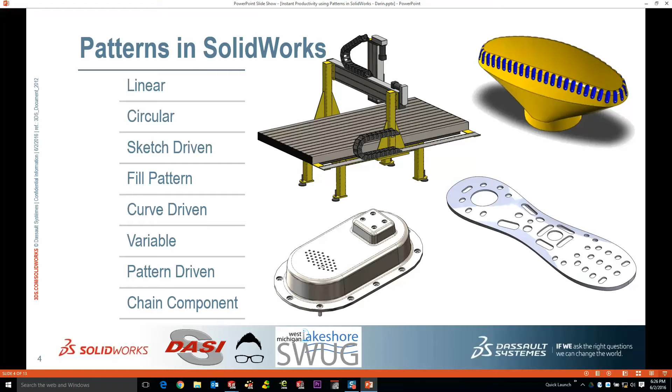But linear and circular patterns really just scratch the surface. We get into other more complex things. Table-driven patterns, I'm not really going to show that, but it's very similar to a sketch-driven pattern. But even 3D types of patterns. Very, very nice tangencies, the way they follow curves. And then some things we've added in the last couple of releases, these variable patterns. Whether it's just varying dimensions of features during the pattern, or using a table to drive these things. So we'll show you some fantastic things with those.

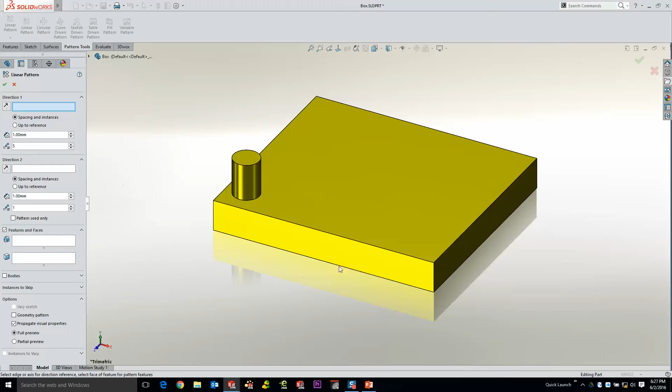So with this, we're going to start with a basic linear pattern. Now, with linear patterns, it's real simple. You define directions with some linear entity, whether it's an edge or a sketch entity, those kinds of things work pretty well. So just by selecting each of these edges, you'll notice we're grabbing different directions, and then the feature to pattern is going to instantly give you a preview.

So as we start to change the spacings and the number of instances of this feature, obviously we're going to get a preview. Now, if we start to update the second direction here as well with an individual instance or multiple instances, we want to make sure the directions are proper, so the tiny buttons here will allow you to control each of those. And of course, by adding additional instances, you'll get a nice preview of each of those.

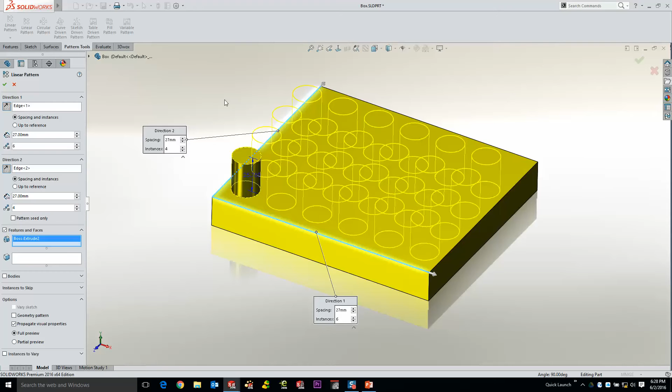Now, one of the keys to this also is the ability to be a little bit more fluid with patterns like this. A pattern like this one's going to give me kind of what you'd expect, all entities in both directions. A couple of the features I really like to show on this one, since everybody's probably touched this one at least once, is one of these options down here that allows us to pattern the seed only.

This is very effective, especially when you're doing a pattern that goes in opposing directions. So if we're using the same edge to go one way and then that same edge to go the opposite way, effectively patterning from the middle, you'd want to just pattern the seed. Because otherwise you'd end up actually patterning the pattern over top of itself if the instances and the spacing are identical. And that can lead to some downstream issues that we have with some other patterns I'll show you later.

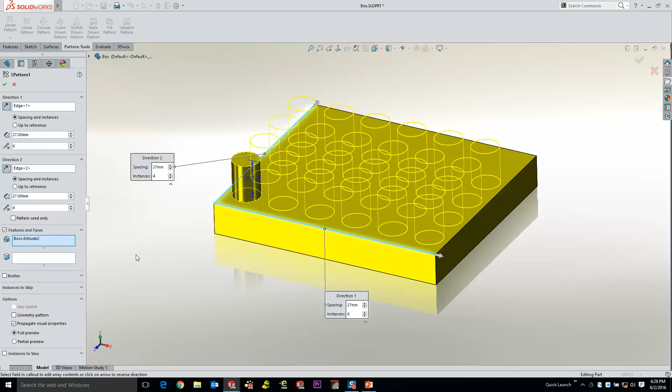But by patterning the seed only, you're going to get a pattern that looks more like this. So in this case, only the extrude is the feature that gets patterned. Now, as we edit this, there's another option that kind of meets it in the middle here if we pattern everything. And sorry, the preview is the same color as the part here. But instances to skip helps a lot in this case.

Now, it activates a bunch of magenta dots, which is very similar to what you might see during weldments and sheet metal. These indicate that you can individually action on any of these locations. And when we're talking about patterns, we're essentially talking about the ability to instance skip or select those dots and basically select or remove individual instances as that pattern happens. So it's a real easy thing to take care of.

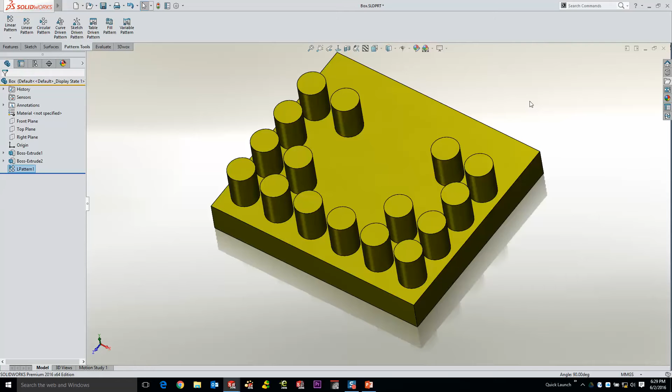And of course, it gives you a little bit more fine tuning when it comes to a pattern that's more or less equal in each direction, but there's a little bit of wiggle room in the middle for some other feature that you might run into. So that's some of the basics there.

Now to take this to the next level, I have a linear rail here, and this is an example I like to show because it shows you how to make a pattern that's going to really kind of change when the geometry changes. Right now we've got a pattern of roughly 18 to 20 holes, and one of the issues with cuts is if you go ahead and take the part and make it smaller, so in this case it's too small to be cut, cut features then start to error out because they no longer have geometry to actually cut away.

Now when we deal with these kinds of things, of course by editing this feature, I've had some really fun stuff here happening with previews in Windows 10 as well, so you'll see me deal with that. But the pattern itself is actually going off the part. Well, instead of changing the spacings and the number of instances so that it can fit on the part, one of the things we added last year in SOLIDWORKS 2016 was this thing called an up to reference.

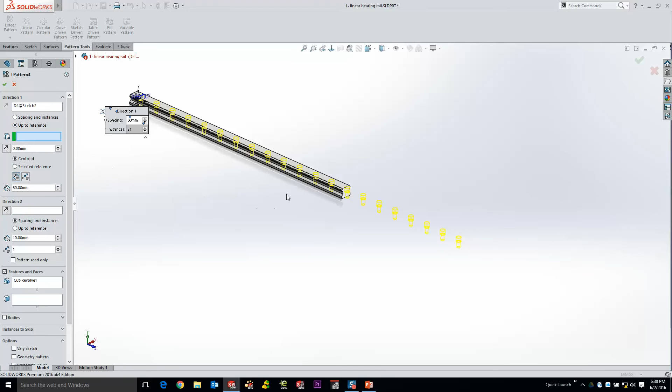So instead of just indicating the spacing and the number of instances that you want, the up to allows you, much like an up to end condition on an extrude, to actually reference a piece of geometry and limit where that pattern actually falls. So if I say up to and then select a point on this end face, essentially that end point is now the distance controller.

And what happens with that is as we go ahead and start extending this rail out a little bit, you'll start to see that as we get long enough, it'll add additional instances of that hole as we get enough stock left. Okay, so that's pretty cool right there. Now, one of the things that really allows you to, again, get control of this is this issue where we have enough geometry for a hole to pop up, but it really pops up in essentially a half section when there's exactly 60 millimeters there.

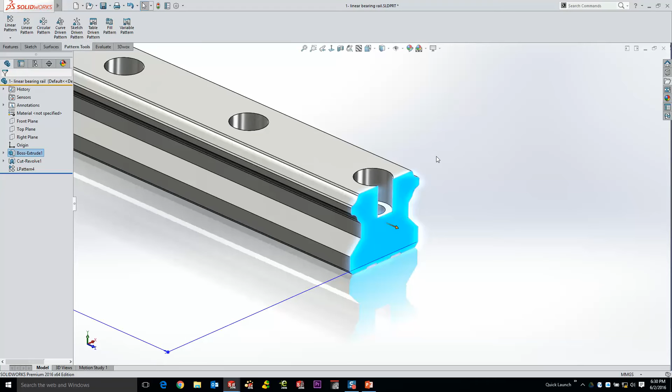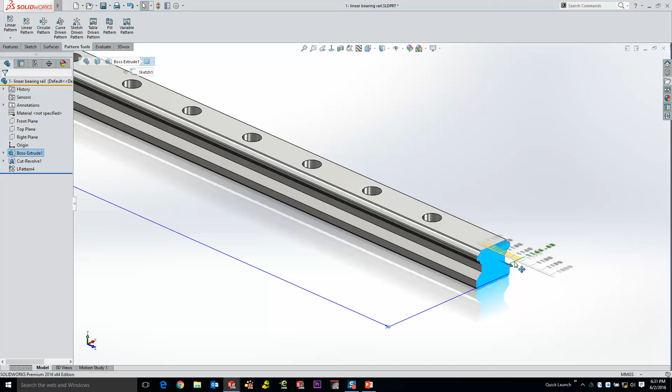So by editing this linear feature, we've also got a neat little thing here that allows us to then give it an offset distance. So in this case, if I want to have not only the spacing between the holes of 60, but also a little bit of stock, you can type in the distance that you want. And then once you have your 60 plus the additional 25 of stock is only when that hole is going to appear. So now when it gets a little bit longer, it's going to go ahead and then start picking up that feature. So that's going to be constant spacing, variable instances.

Now we can also change that up a little bit, and instead of that being set to constant spacing, we can also just give it a discrete number of instances. So in this case, if we wanted to have specifically 20 holes, as I start to change the size of this feature, the number of holes is going to stay constant, but now the spacing will update as a result of the geometry change.

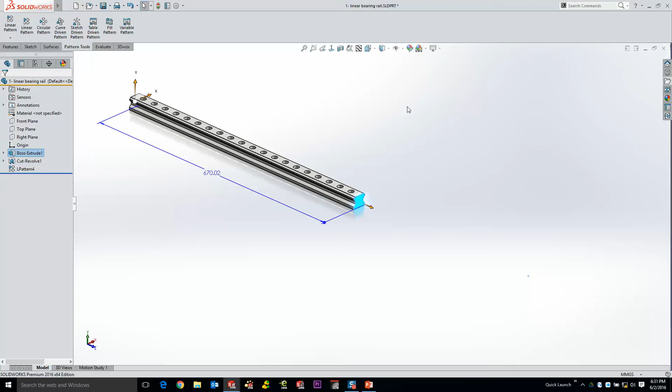Okay, so it's pretty smart. We used to do this with equations: the overall length, chopping off the stock, divided by the number of instances minus 1, is essentially how that was done before. So a pretty nifty way to deal with that.

Now getting a little deeper on this, I want to show you some circular pattern stuff. Just as easy, but there's a neat end condition that I want to show you here that can up your performance in patterns as well. Now I'm not going to show you the threads that we've got on this 3-step drill, but that's a circular pattern where we basically swept a feature and then patterned that 3 times around the axis to give us 3 flutes.

What I am going to show on this one though is this little circular part that we've got here. Now to lay a little groundwork, I've created an extrude that goes up to a plane that's on an angle. When you're doing a circular pattern, real simple thing, go ahead and select the features that you want to pattern, and then for the reference, you can use an edge, an axis, or a cylindrical face or edge, and that will start your preview.

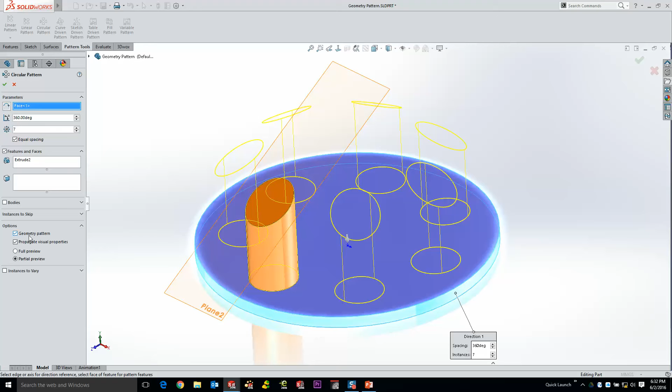The key to this one though is this thing called geometry pattern. Anybody ever use geometry pattern? Okay, you should if you can. Essentially this is going to be the performance setting for you. Now, I want to show you this as a performance setting, but I also want to show you the behavior that it exhibits. When you do a geometry pattern, it's not calculating the end condition of each individual instance.

So essentially, the preview that we get right here is exactly what you're going to get for your solid feature. What it does is it patterns the body, or the absence of the body if it happens to be a cut, but it does very little calculation other than the number of instances. When you make a pattern, geometry pattern is typically off by default. Now, my preview didn't change, but what it does is it calculates every single instance.

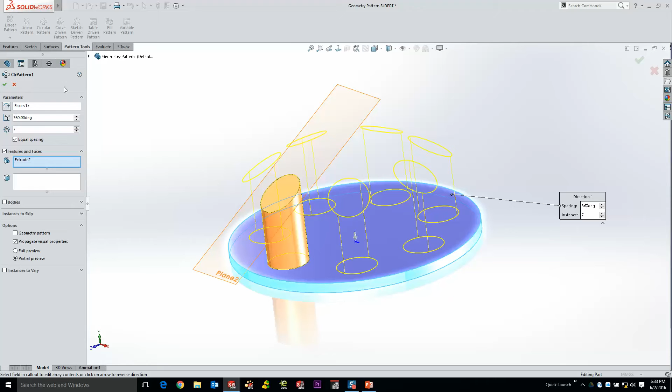So if you have tread plate where you're going to have 50 holes by 2000, each instance will now be calculated. And the result of that gives you this. So that's what you want to keep in mind when you're doing patterns. And this is any pattern, not just linear patterns, but the circular really shows this one in a more effective way.

So if you want better performance, try geometry pattern. If it says you can't do it, just turn it off and the other one will work. But give it a shot either way. So that'll give you a lot more capabilities and, again, better performance with those kinds of things.

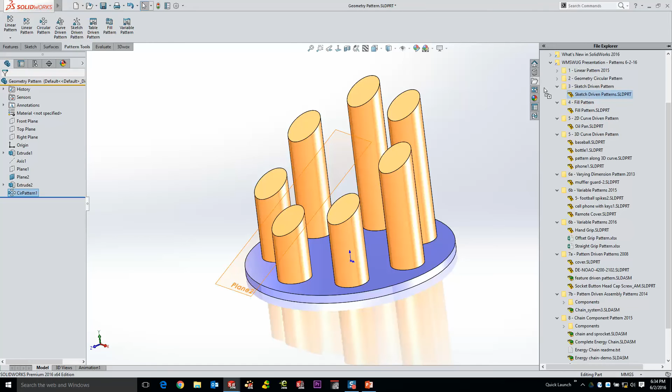Sketch-driven patterns are also fairly basic; you just drive those with a series of points, much like you would if you're creating a series of holes using the Hole Wizard. So back into SOLIDWORKS here, if we're going to use these types of features, let's go ahead and grab that one. All I have here is just a basic number of points. Now, to really run through this, let me just sketch a feature.

It doesn't really matter where it is. The offsets are basically going to be constant. But with something like this, we're just going to create something for visual sake.

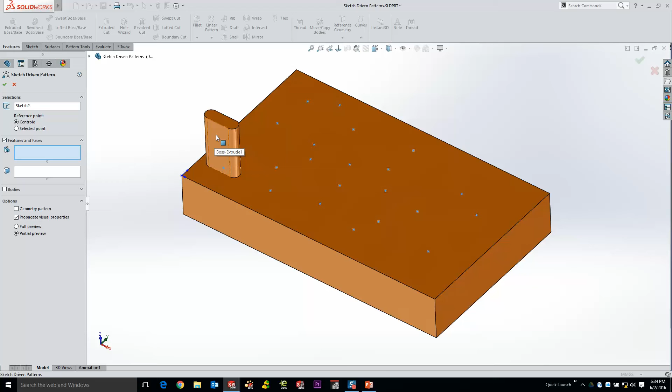So now that we've got this item here, under our pattern tools, we'll go ahead and use sketch-driven pattern. The inputs are very simple. Once again, I have a sketch that's a series of points, and then I have a feature, features, or faces or bodies. We can go ahead and pattern those, and they will be at that very odd spacing.

The key to this one, though, and for downstream usage, is that the sketch drives the whole thing, number of instances and positioning. So if you do go back into that sketch and edit the feature, just by adding additional points anywhere that you'd like, or by taking points and either moving them or changing dimensions, that's all going to update the number of instances that show up in that pattern.

How do you control that point that goes to the sketch? Which one? These points here? Well, on the slot, there are 3 points. Middle point and the 2 end points. So which one, how do you pick that?

Oh, well, the way that I created this one happened to be - that was a new sketch there, excuse me. The way that I created this one happened to be just by using the slot tool where I snapped it right to the center.

So if I want to go snap to the right-hand side, how do you do that?

Oh, yeah, that would just be by drawing this feature differently. So if that's going to be where the centroid of that point is, then what you're going to see is that that's going to be the exact same offset for every individual instance here. So they're all going to be peppered along that same feature the same way. So it's essentially where you position it relative to the sketch points that are active there.

Oh, so the point that you want to snap and the orientation you want to...

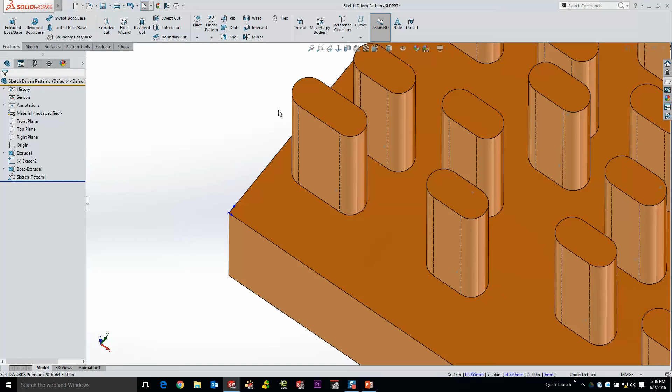Right. You want that first feature to be that way, and then everything else is just going to be basically like hole wizard holes, essentially. So hole wizard holes being a revolve, they're all going to be right on the center no matter what you do. This one here, you just want to have that a little bit more relative.

So there's table-driven patterns as well, which would be a text file, XY points essentially, because it's a 2D type of an entity. Works very similar to this.

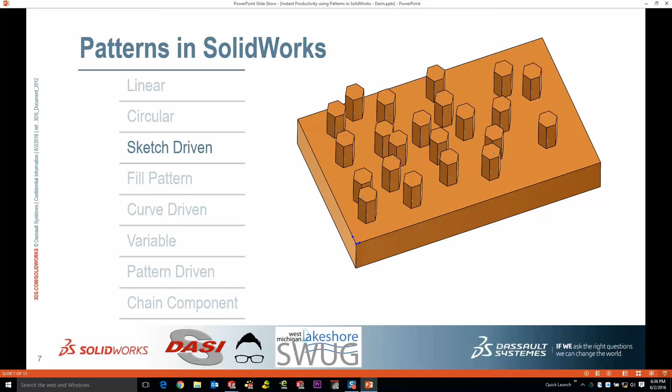Sorry, I'm talking fast again.

The fill pattern is where we start to get a little bit more exotic. Now this allows us to use essentially linear pattern features, but it really gets a little bit deeper than that, to contain this pattern within a given location.

Now that boundary can be a few different things. It can be just a sketch, as I'm using here. It can be a face. It can be split lines used to split a face, which would effectively be a sketch at that point. So all of those types of things are available.

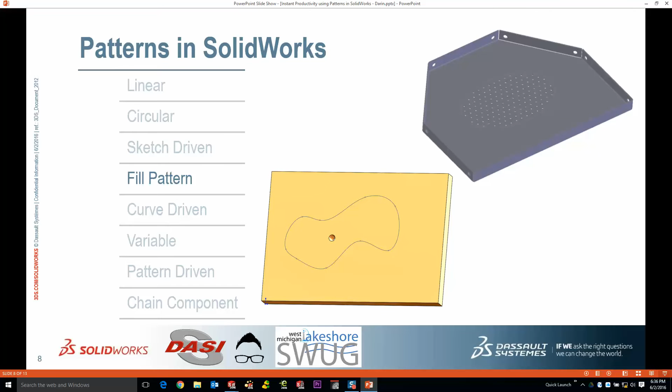But what it does is it keeps the distances and the offsets within the actual feature itself that we've sketched. So here I've got a circle that's actually inside this hole, inside this kind of kidney-shaped spline sketch.

When you go ahead and use the fill pattern, essentially there's 2 ways to deal with this. You select the boundary no matter what. This can or doesn't have to be a split line. Once again, I'm just going to leave it as a sketch.

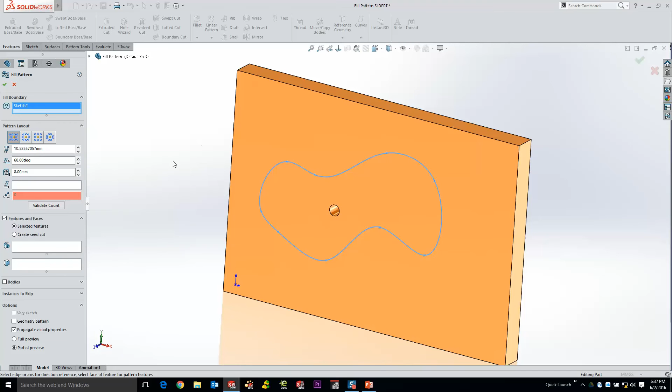But you can choose to go ahead and use a selected feature if you'd like. Now, a selected feature would actually be discretely selecting this hole. So that's the important part about that.

Once you start to deal with that and give it an orientation, which I'm going to use the bottom edge, it will then start to populate within this given boundary. Now, the way it populates is everything to do with these settings up here in the top.

So if I want to start in the middle and then spiral out from this, we're going to change some of our spacing so we get a little bit more of a dense population in there. The kidney shape is sort of killing this just a little bit.

But as I make this a little bit smaller, this value right here called the offset is actually keeping a margin between the outside of this pattern and the actual pattern itself. So as I start to lower that number, you'll start to see more instances appear as they start to skirt the edge of our boundary.

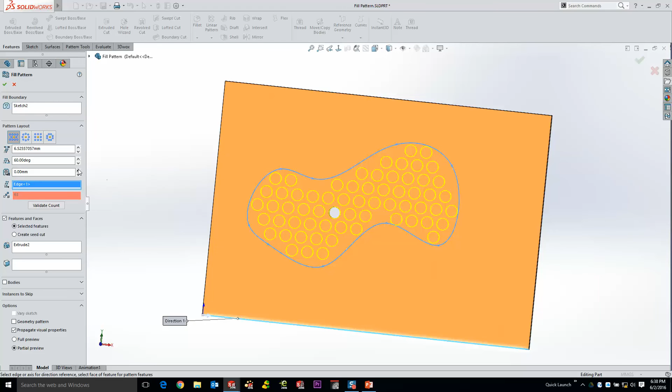Now, if you start to make that zero, if the offsets are proper based on these other angles and spacings, you'll start to get these things snuggling right up to the edge. But you can see that as we start to change that margin, it gives us that offset, that controlled feature.

Now, we can do this, and of course the sketch drives everything, just as everything else does. So if I start changing that sketch, what we'll now see upon a rebuild is that it will repopulate that area. So earpieces on a cell phone or grills or vents or any of the types of things.

It's a really nice, effective way to deal with this without making a real linear or circular pattern and then skipping instances. So kind of another way to skin that cat.

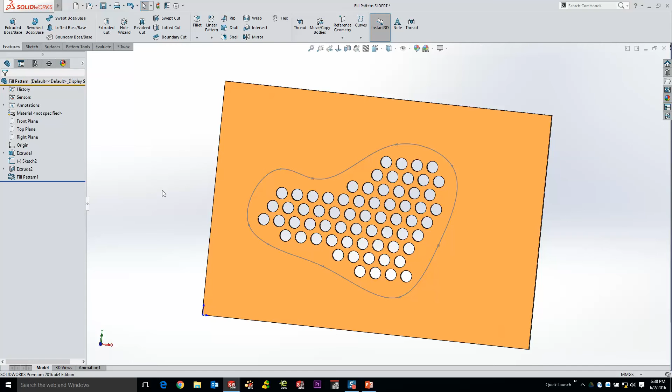When we're dealing with this though, I had actually drawn a circular feature here and cut it. Now that's not necessary really. We've actually got this thing down here called create a seed cut. What that will do is give you some basic primitive shapes that SOLIDWORKS will determine.

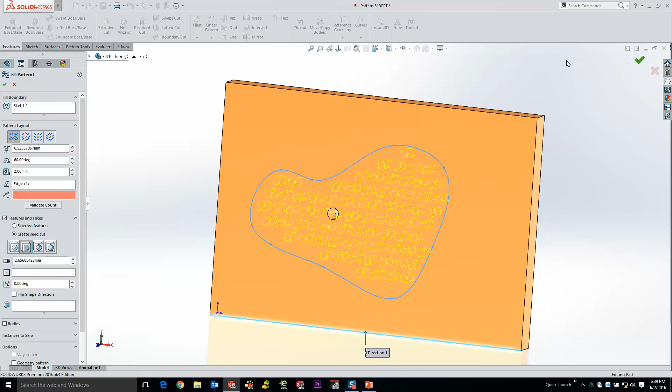So if you want to go ahead and use a circle or a square instead, change the geometry of that square, and then again start to tweak the offsets that we get here. Those kinds of things are then going to go ahead and use these primitive features instead of the created feature that I made.

But it's kind of a library or just a repository of the most common items that you'd want to use. Kind of along the lines that SOLIDWORKS did this year with the sweep feature, where we have a feature where you can just say circular profile instead of actually creating a sketch for that, since it's the most common type. But these are pretty interesting nonetheless.

When you start to get more exotic, now you start to get into curve-driven patterns. These are patterns that just don't fall into these very generic boxes. I'm going to show a couple of these.

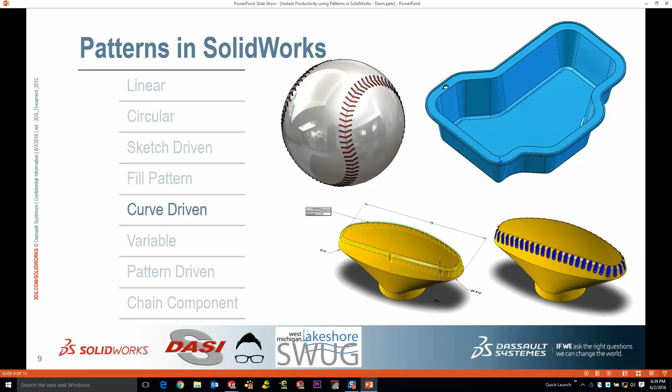We've got this knob in the corner here, and then this oil pan that I created that's got an extremely odd border around the edge of this. So the oil pan is going to be the first one I start with here because that would be a 2D curve-driven pattern. So we'll begin with that one.

The previews are something you're going to want to rely on with these kinds of things. So when we get into our pattern tools here, once again, we're going to use curve-driven pattern. And many of these features are also available inside of the assembly as well.

So when we're dealing with those kinds of things, you're dealing with either component patterns that we're doing, or you're dealing with deriving patterns from existing feature patterns. But the curve-driven pattern works in both of those places.

Now the curve that I want to use, I actually haven't created yet. I've got one there that's hidden, but I want to show you how you can get to that as well. Something like this is pretty simple.

I'm just going to right-click on an edge. You got a simple selection here called Select Tangency. As long as that edge blends smooth with all the other edges around the part, that's going to go ahead and select them in sequence.

Under your Features toolbar and Curves, you can go ahead and create something called a composite curve. And that can be a combination of any of the feature edges, part edges, sketches, or other types of curves like helixes. You can combine all those together to form one individual curve.

Now with that curve selected, when we go ahead and do this curve-driven pattern, all we have to do now is go ahead and fill in the feature that we want. We can either select the keyhole that I've got out here graphically, or we can go ahead and select that thing normal. So usually what you get in your offset is something like this.

Here's your preview, and you see how things are staying in their relative position to the right offset that we get off of this path. The other thing you see from the preview is that all the keyways are in exactly the same orientation.

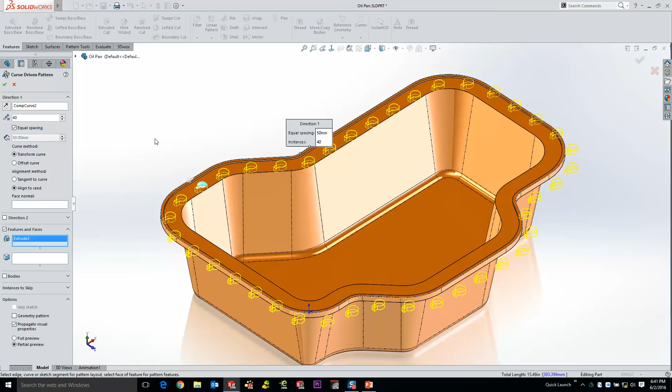As you know from a lot of the features in SOLIDWORKS, things are typically just a radio button or a checkbox away from working the way you want to. So always experiment with things over here in the Property Manager.

Over here, there's two that I like on this one quite a bit. Tangent to curve is the second one that I'm going to use. Align to seed versus tangent to curve is going to change this and make the orientation follow at least the path direction as it serpentines around this odd spacing. The transform method here, doing offset, will actually keep it offset inward versus offset to the same direction relative to that curve. So those are the two that you really want.

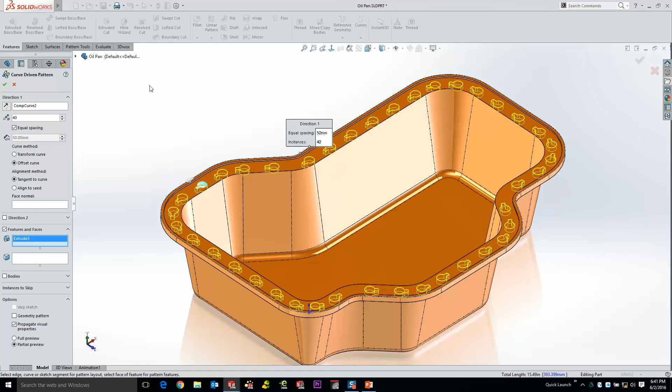If I go back to align to seed, you'll see again that they're in the same orientation, but tangent to curve is going to make them, as they're all walking around a path, equal spaced around this part. So this one here is quite nifty. Once again, something you really can't even create by trying to cobble together linear patterns and skipping instances or anything like that. Very difficult to do in any other circumstance in this respect.

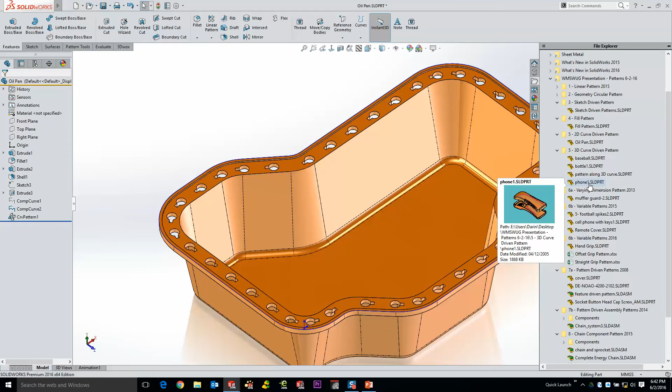When you start to take this to the 3D method, we start to get a little bit deeper when it comes to this little knob that I want to use on this one. Actually, I'm not finding my knob now that I'm looking for it. We'll go ahead and locate that. That's the one we want, I think. All right, so we've got this piece right here.

The reason I wanted to get 3D on this is because those tangencies are emphasized now that we're not just talking about a 2D planar orientation. The curve that we're going to follow on this one really took place before we added this fillet.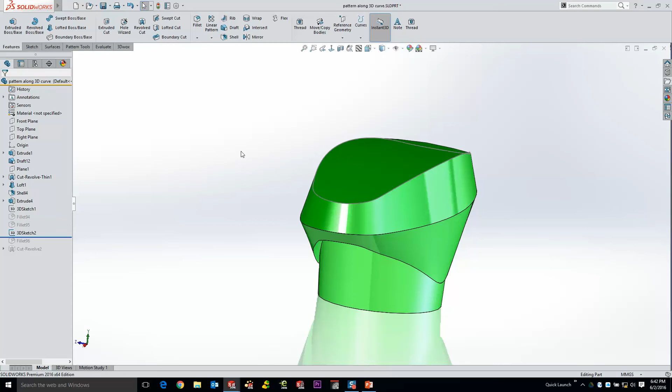Just to really demystify this for you, since we're more of a learning environment, this is a 3D sketch converted edge. Could also be a composite curve of that edge. But one way or another, we have this curve right up here that was taken off of the existing geometry and then a fillet in order to go ahead and offset that a little bit.

It's the same process, though, in exactly the same tool. When you go to your curve-driven pattern here, we're still doing the same inputs. So I'll select the 3D curve as my pattern curve, the actual feature we'll select on screen, and we're going to get a little fighting of the previews that we've got here. So I'm going to try and get that to go.

Again, we've got some orientation issues here. You can see that they're all slanting down and to the right. So on this side of the part, they're going to be piercing the part as opposed to being tangent on the edge of the part as we see over here. And yeah, the previews are really having a problem on this one.

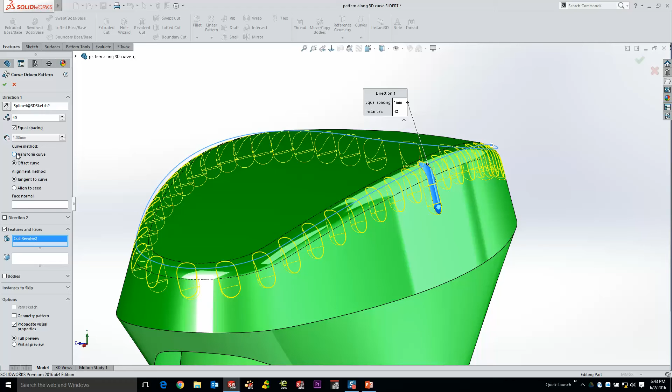But one of the orientations that we need on this one, same with align to seed and tangent to curve and offset and transform, is that's going to allow you to change the position of each of these features. But there's this other thing called a face normal.

Now the face normal is this really odd face that's more of a slotted or elliptical shape going around the part here. And when you select the face normal and click this face, that's going to give it the orientation that it needs to position these in the proper position.

So now you see they all slide as if they're rolling around this part, following the curve, but following the direction of the face, more importantly, relative to the way the initial seed feature follows that face.

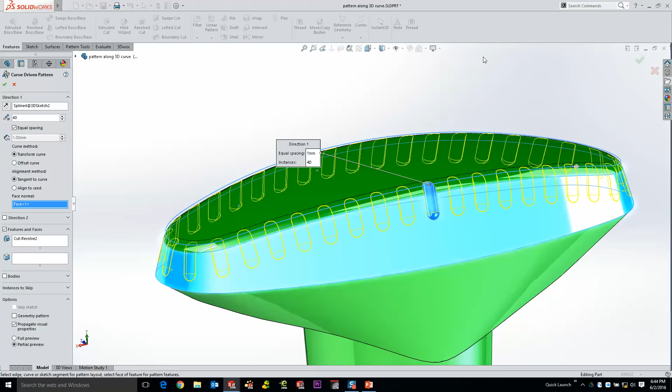So the final result of this one, again with a few checkboxes and a couple more inputs, is going to give you this really fantastic looking feature that follows that 3D shape and the face that it needs to map to.

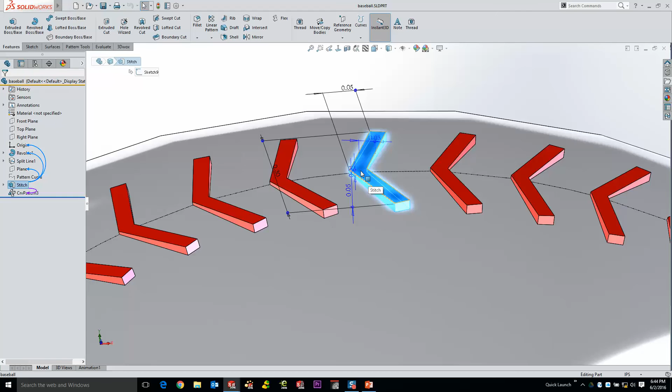So quite nifty on that one. I won't show you the creation of this one, but the baseball is one that I really like to show as well. This is just a simple tie or a stitch that's been placed on a plane at a point tangent to that face. And then all we're doing is using a nice little curve that was created by actually taking a very simple horseshoe-shaped sketch and using that to make a split line.

So if we go ahead and roll back a little bit, you can see how that takes place. We made a sketch, little horseshoe shape, and then the split line in both directions is going to give you the thread path, or the tie path. Pretty interesting. So once again, little stitch extruded out there, and then that stitch patterned in 3D space tangent to one of these two faces. So quite cool there. Any questions?

Yeah. We make speaker grills and have slats, and as they get closer to the edge of the border, they get smaller. Changes this distance, yeah. The slats itself get smaller. Yeah, I don't have an example worked up for that, but the next couple of features I show you might be the key to your situation there, which really allows for a lot of variation to be injected into this process. So hold that question for just a little bit more.

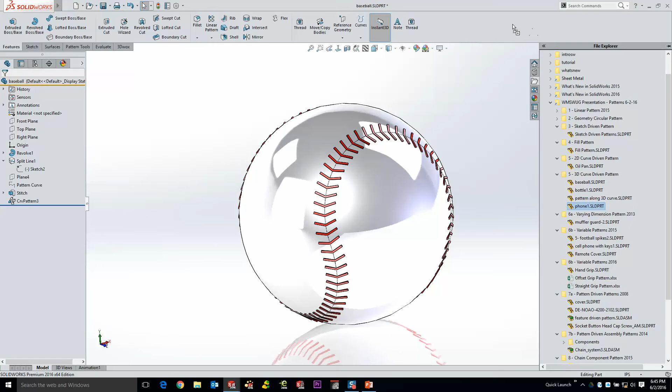This is another one, I think this is the phone I'm looking for. Yeah, so that's got some ridges on the back. It's a pretty archaic little phone compared to today's standards, but you get the idea. 3D curve following the orientation in that position. So going a little deeper on this one, we get into this thing we call the variable pattern. Now this allows us to not just pattern the seed as is, but to change the seed as it's patterning in really any way that we want to based on dimensions of the feature or other inputs around there.

Now there's two different ways to do this. Back in 2013, we had a nice little demonstration file here that was just simply the ability to use run-of-the-mill linear patterns and vary the dimensions as you patterned. But then we started getting into 3D things. These are going to be created in much of the way that you create a design table-based part, so configurations. But it's a table-driven type of a pattern, which really opens up a wealth of other opportunities when it comes to changing orientation, shape, and so on.

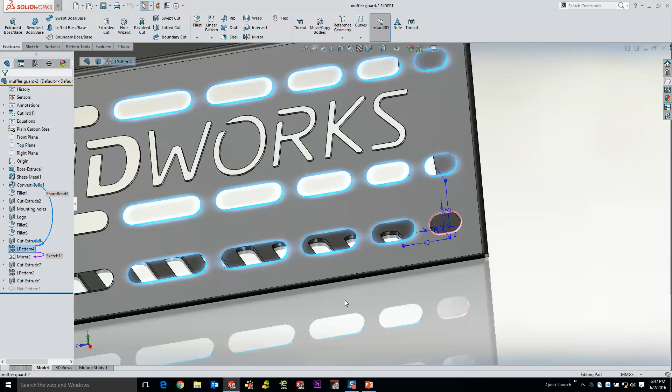So let me start with the basic muffler here for starters, and then we'll get a little bit deeper into this. So each of the features that we've got here were created by using these patterns. What we've got up here is just a basic linear pattern. There's a slotted feature here, which is our seed, which is tiny. And then as it moves to the left here, it simply expands. Now it's expanding, but we're also varying the spacing in between because obviously the gap between dissimilar sized features is constant. So it's a real simple thing to pull off.

Now down here on the bottom, we're actually creating a pattern here by using a seed feature in the middle. And as it's going in opposing directions, it's getting slightly smaller. So constant spacing, but variable size of the feature itself. So I want to show you how that's done on this side feature right up here. So another slot. Now we're not using a different tool for this. I just want to show you some other options in the common tools that are already there.

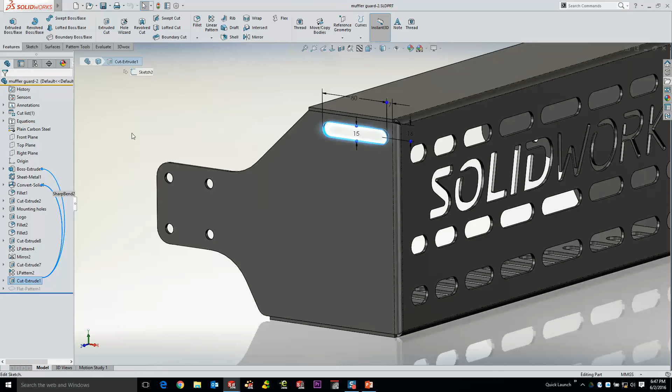So this one here is actually the basic linear pattern. We set it up the same way. I've selected my feature already. Now I just need to give it a direction, which I'll use a simple linear edge for that. And we'll just do 5 of these at 30 for right now. So let's drop that down a touch. Now down here at the bottom, actually right at the bottom, there's a checkbox called Instances to Vary. And when you click that checkbox, you get additional interface capabilities down here.

Now what it assumes is that the spacing is probably one of the things you're going to vary. So it's a default right here. So what I can do is say with each subsequent instance, I want to vary that spacing by 7 more. That's going to update our preview so we get 30, 37, 44, and then continuing on. But then what we can also do is click in this box where it says choose feature dimensions to vary. And that can be any of the dimensions used on the feature itself.

So once I select the slot width and the slot length, they actually become inputs on the flyout tool tab here, as well as in the property manager. So what we're going to do on this one is we're going to take the length of 80. With each individual instance that adds to it, I want to add 40 millimeters to each.

And again, dealing with the previews here, let's click over to full preview. So now by adding 40, each of them grows 40 as they go. And then I also want to go ahead and change the width by 4 with each individual. So now each of them gaps up a little bit more with each individual instance.

Now down here at the bottom, of course, we built this as an example. It's not going to work for every situation, but those little magenta dots there are the savior to this type of a situation. They're instances to skip if you're doing a run-of-the-mill pattern. But in this situation, when you click on that dot, you can either skip the instance or modify the instance, and then it becomes individually editable.

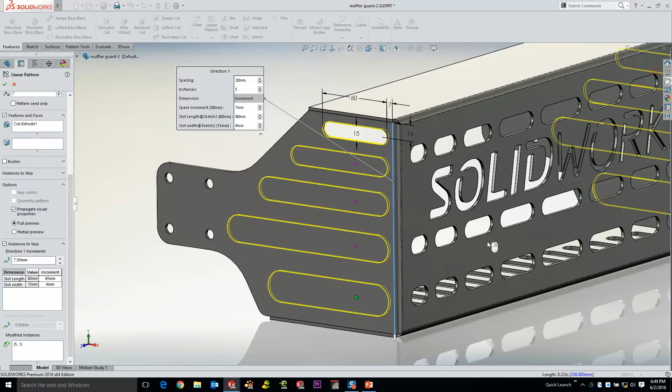So now in this case, the overall length as it calculates up has now transformed to 240. I can discretely type in any value that I want for that instance and override the entire situation. So 90th percentile gets you there, the other massaging will get you the rest of the way. And if all else fails, extrude over it or skip it and just make one feature in there.

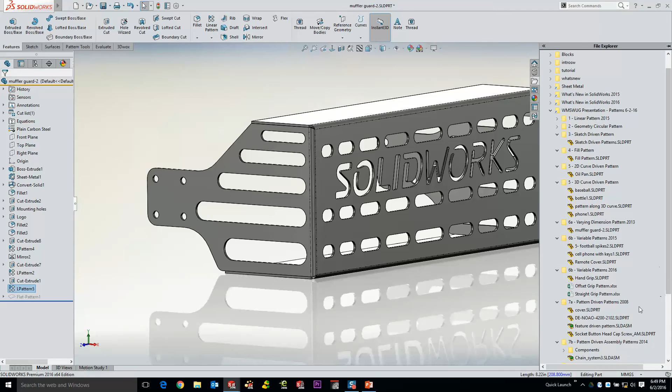So great way to make those patterns. But that is basic linear pattern, basic pattern features in any instance where you can skip those or vary those instances. So pretty cool stuff on that. What we added in SOLIDWORKS 2016 and it's really gotten a lot more sophisticated is the ability to go ahead and create something that's now going to be driven more by a table. So let me go ahead and show you this one.

This is a little pattern feature here where it's really got actually a lot more going for it. Ingenious ways of modeling can really save yourself a lot of time and create some very complex but really simple features as they go. Down here, to show you what this feature is, we've got a pattern that starts by using this seed feature. It's effectively a slotted sketch extruded out with a little fillet around the edge. And then we used a surface to hack it off that's offset from this compound face here.

But the key is the fact that this is more of an S shape. It's more of a spline type of a shape here. It was built on a plane that was created at a point. Let me get the right planes. You can use 3D Sketch and you can put a point on any face. By default, that point goes coincident to the face.

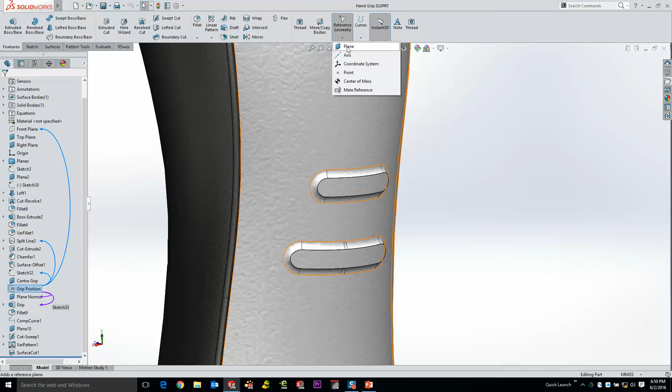You can then go ahead and insert a plane tangent to the face, coincident to the point, which means any plane that we put in will then sit in this really nice little spot here, right along the edge. But the important part is that as we pattern that and it moves over here, the tilting of that plane will stay tangent to that face as it goes.

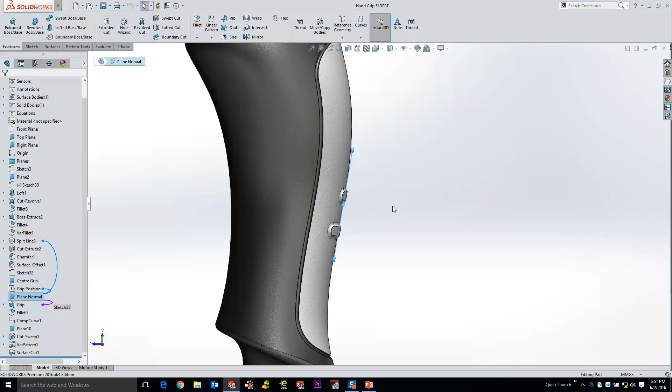Now using this tool, we're not only going to pattern the slot and the fillet, but we're also going to pattern that sketched point and the plane as part of it. And all of that is really going to build up to be a feature that actually follows the contour of this face. So enough of the hand puppets, let me get into this.

So by editing the feature, what I want to show you here first of all is the input. You select the feature itself, so the grip, which is just the extrude we've renamed, and then the fillet itself that's at the base. And then the reference geometry, which is the sketch point, the plane, and then grip position. I'm not sure what that is. I think it's another plane offset.

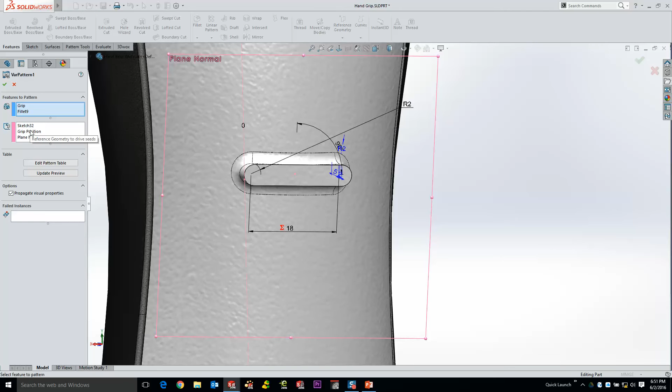Using this tool here, which is called the variable pattern, we actually use a table to create this. Now the table we have right now is very simple. We have one additional instance. If I update the preview, that instance is slightly below. It's offset a little to the left, 2 millimeters, and in this case it's 17 millimeters away. But it's also larger than the original. The original is 18 millimeters, where the new one is 24.

Now by tweaking any of these numbers, you'll be able to see that the preview updates, which in this case we're going to slide that slot over to the right just a little bit. Now down here at the bottom, you can add additional rows if you want. Whatever number is typed here when you click this button, it's going to add an additional to it.

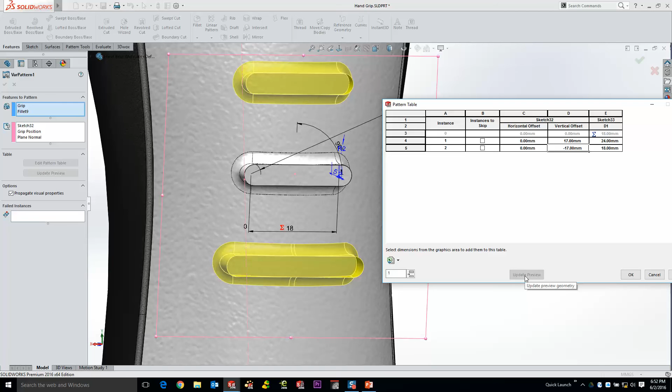Now with this one, we can do a lot of things. We can type in negative numbers, which is cool. Negative numbers is going to give me another one in the opposite direction. If we change the width on that one, of course, that's going to modify that individual instance. Now the one on top will also get a little larger. Well, this can be tedious if you've got a lot of work to do.

So this tool is also able to use spreadsheets as the driving feature. What you'd do is you'd set up this part of it right here. And then with this button, we'd export that to Excel. That way you'd have the proper format, the proper column headings with the proper dimensional values and feature names. Then you modify it in Excel and import it back from Excel once it's all said and done. And that gives you the ability to use things like concatenation and other formulas that are a little bit more powerful than the way this table works.

So I can use a couple of different ones here. I want to use this one called offset. And it's basically going to start moving these things left and right. It's going to change the widths of them and then of course space a few above and below. And by importing that into this table, that allows me to then update my preview, which is now going to give you a really fantastic result here that actually is going to follow in a very odd pattern.

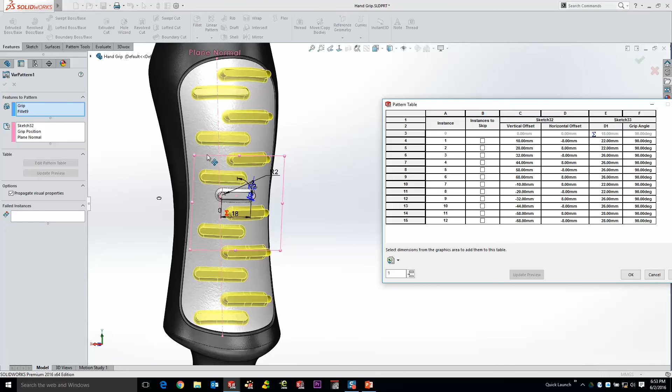One individual pattern feature. But like I said, we're also patterning that point coincident to the face and then the plane tangent to that face, which means this pattern actually follows the shape of that face. So it's a really effective way to get some phenomenal geometry without a lot of extra work. Previous releases, of course, this would have taken an individual instance basically for everything that you've got here. So that creates a really awesome pattern with a single feature in the feature tree, which is quite cool.

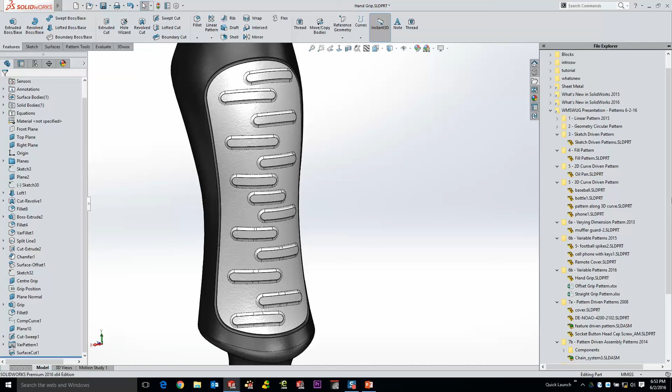Now that gets a little bit deeper depending on what we want to show. This is one I showed a couple of years ago, these football spikes. But it's the same kind of thing. It's a variable surface here, very organic shape. And all we're doing is taking one original spike down here and patterning that distances to the up direction, to the right, and then tilting an angle so that you see each of those are in a different position. We started with 24, all the spikes on the heel are 24, and these are all 18.

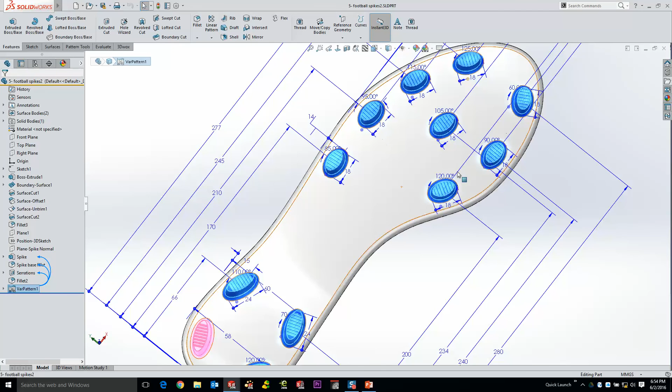But it gives you the ability to then take individual instances and we'll modify the position of a spike. And as that moves down, what I've done here is effectively edited the table. So that cell in the table will now say 150 instead of 200. And of course I grabbed the wrong dimension for the wrong feature there, so that's going to look really ugly. But we'll do the one in the middle here as well.

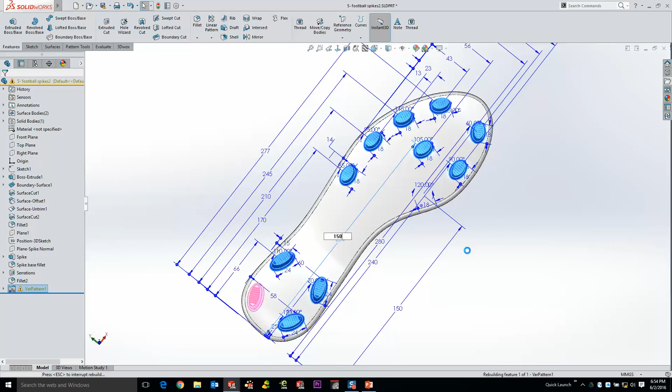And when it pulls it down and towards us, it basically tilts it the same angle tangent to that face still. So kind of hard to see on the example, but it is following the contour much like those slots just did on the grip handle that we've got there. So really cool stuff there.

Last one I'll show you here, this remote cover is pretty good as well. Believe it or not, this is one feature and one pattern. Take a look at this variable pattern. Each one of those was made by using a single table.

So when I show you the table here and just simply update the preview, this one set of columns is taking the one slot and it's patterning it in distances, directions, tilting it, changing dimensions, and it really is only about 5 columns within this pattern. It's worth the wait when it comes to the preview updating here.

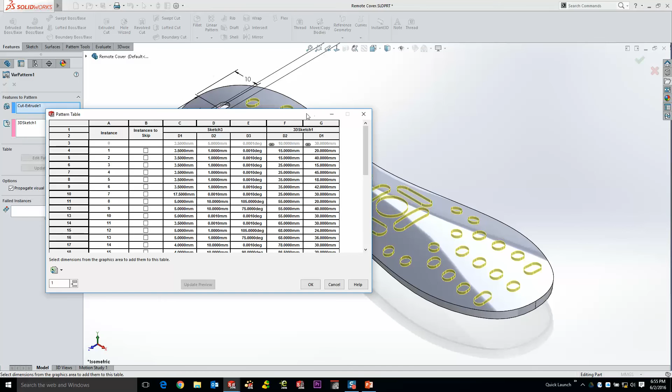There it goes. So that is one pattern feature, but really this is the entire table. You're seeing the whole thing. There's 5 dimensions being controlled on this, which is X, Y position, width, angle in some cases, so we're getting slots in different directions. But that is a single feature creating absolutely every single one of those holes. So I find that phenomenal. Great example file though, something you can really draw upon for creating these types of features.

Yikes, got 5 more minutes here.

What a lot of people I find, and these are even seasoned users, don't realize is that when you make patterns at the part level, you can leverage those patterns at the assembly level. Anybody not know that? I should have done the other way. I want to get everybody to raise their hands once. So if you already know this, then I'm really just telling you what you already know, but I might even show you something here that you might not be aware of.

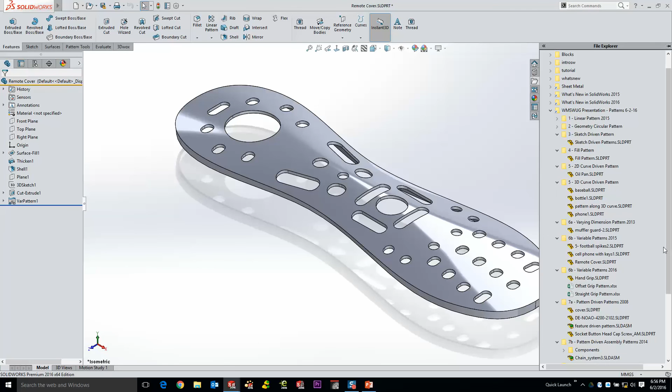So the first thing we're going to get into is this cover that I've got up here, because it's actually 3 different examples of the same type of thing. Let's do the entire assembly. So when we get into this assembly right here, what's interesting about this is by making the pattern in the part, you've now got a single one-stop shopping edit. You edit the feature in the part, and everything else, right down to the bill of materials on the drawing, will update the instance count of other features referencing it.

So here I have a simple Hole Wizard hole set. So a few different ways that we've created this. This is just a Hole Wizard counterbore hole and just 4 points that we've selected. So actually no pattern there. But in an assembly, you go onto your assembly pull down and we've got our linear component pattern. Now this thing got renamed. It's called Pattern-Driven Pattern. We did that in 2015. It used to be called Feature-Driven Pattern. So just in case you're not sure what that is, it is the exact same thing.

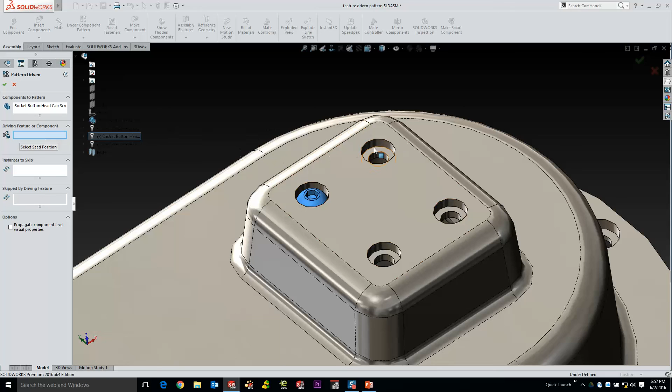It requires 2 very simple things. The components you want to pattern, which in this case is just one fastener, and then the feature of the part that you want to drive it. We'll just go ahead and select this. You'll see that it automatically populates those holes. Now, of course, if we go ahead and edit this cover and change the hole pattern and add additional instances or change positions, those fasteners are going to move right along with it. I'll show you that actually in a future feature here.

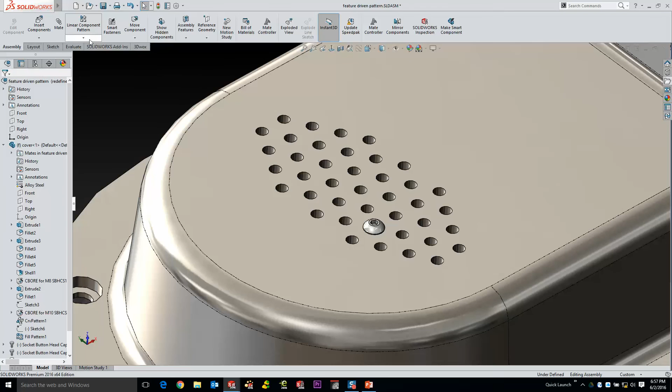What I love about these features, and this is where you might add a little bit to your knowledge gap here, is that you don't have to be terribly conscious as to what the seed feature of these original patterns are. So in other words, if we take a look at this cover, I've got a hole pattern over here. It's a fill pattern. And in this case, the seed feature is inside this hole. But that's a fill pattern like we just did on that previous example.

By doing the pattern-driven pattern, once again, select the feature, select the actual hole pattern. Oop, not going to work there. Let's select the hole pattern. And then you automatically get a very nice preview of what each of those happens to be. So once again, leveraging what you've already done, and if the feature on the part changes, it trickles down all the way through the drawing.

This pattern that we have around here, though, this is a curve-driven pattern. And the key to this one, if I go ahead and select it, is with the color coding, you can see that my fastener is not in the seed hole. You don't have to be aware of that. And that changed quite a while ago. You used to have to be that way.

In this case, I'm doing exactly the same thing. Pattern-driven pattern, grabbing the component, and then selecting the pattern that I want to use. You can see that we've got a beautiful set of offsets there. So it doesn't matter what hole you actually originate that in, it's still going to give you the proper offsets to each of these pattern features.

Now, to go the full direction on this one, I'm going to open this part up in its own window. We're going to do a little tiling. Oh, that's not going to look so good. Haha, let's do that a little different. I like to show these side by side, but let's just do these individually.

So now when we get into the curve-driven pattern here, if we start modifying things like instances, probably could have done this back in the assembly for a better effect. But if we bump that up to 20, of course, what we're now going to get is additional holes around the edge. We toggle back over to the assembly file, and our holes are going to be populated with fasteners. So again, very easy to deal with that, and that works for any type of pattern within a feature.

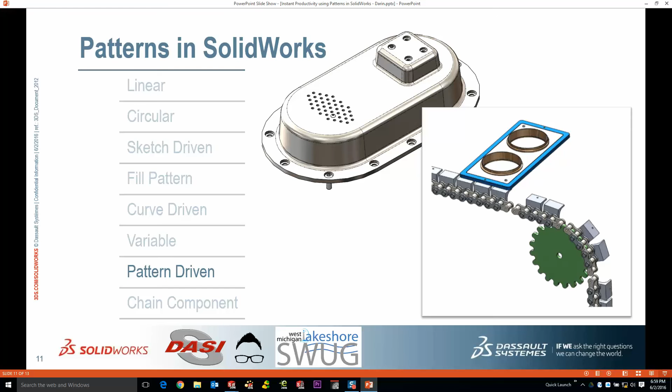Let's go a little deeper on that one. Yeah, Peggy. When you're putting fasteners in, then of course you're only constraining the one, and then you're patterning that or whatever. So what does that do to the size of your model then? Is it better to do it through a pattern or individual?

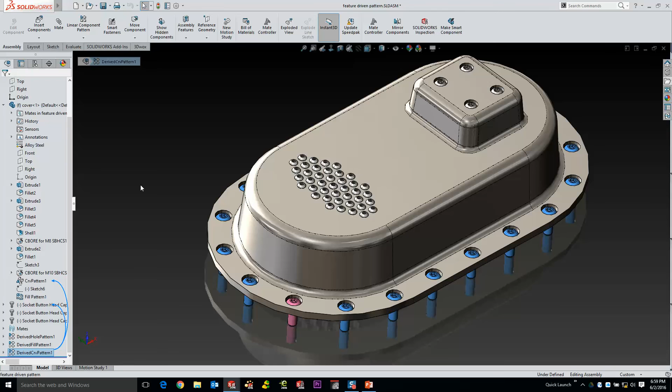Well, individuals, you're going to have to mate each one. And then if you increase the hole pattern, of course, you're going to have to add new fasteners to each of those holes. But more importantly, if you decrease the hole pattern, then you're going to have dangling parts with missing or broken mates. So this one here just rolls along fluidly the whole way.

So if I go a little deeper on this one here, let's just use little breadcrumbs here just in case you guys want to learn some new stuff there. But let me edit this one here. I'm going to move this fastener over to that hole. So again, just to really emphasize this fact.

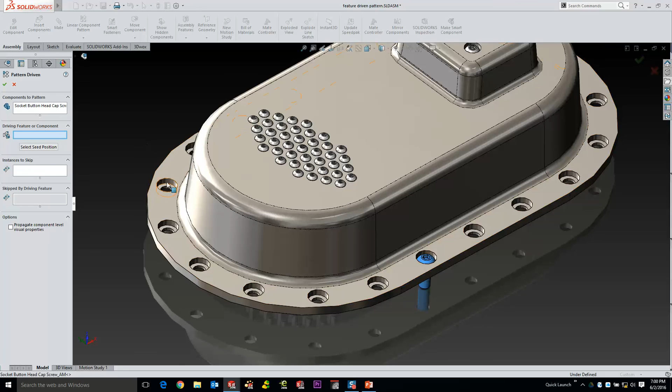Once that part's in place, we go ahead and do the same pattern-driven pattern. So my feature's over here. My pattern is any one of these other holes that we want to use. And once again, very easily puts those in place. So pretty nifty way to be able to deal with that kind of stuff.

One more example of this, I like to show this one as well. It's a little deeper on the chain system that we've got here. But this is a neat little 3D type of a thing where we're not just dealing with individual parts. In this case, we're actually going even deeper into assemblies. But now we're talking a curve-driven pattern and/or a pattern-driven pattern. So in this case, I want to show you both at the assembly level.

Here I'm going to do a basic curve-driven pattern. So once again, the same that you would see back in the part file. The curve that I'm going to use is a 2D sketch in this case. And this sketch happens to go the exact same direction as these existing chain links that you see here. The components to pattern in this case are going to fill out this hole.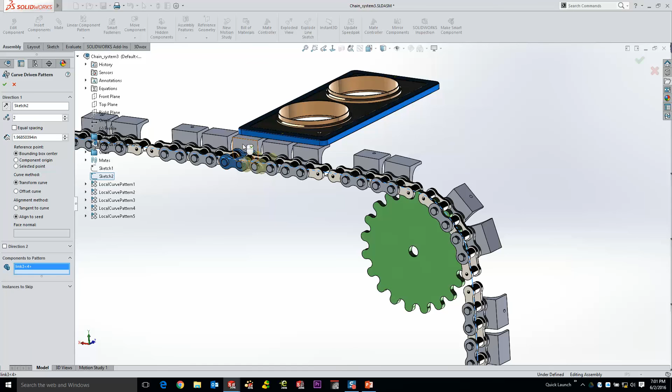So once I start selecting those pieces, you'll start to see the preview that we're going to get. Now I'm going to do 24 of these guys, and we're going to space them out at 9, and then you'll start to see their positions. But once again, as we start to turn the corner, they're all aligned to the same position as the seed feature. So keep in mind, tangent to curve is your friend in these cases. It's going to tilt it, it's going to follow the curve, it's going to keep that position appropriately as it goes.

Now I'm using a curve to drive these pieces of the chain. Well, once that's done, I can use the pattern that we've just done now to drive the rest of the other components that we might want to pattern. This one's a little heavier than just what you see on the screen, by the way, so that's why we're getting a little bit of rebuild time.

But when we then do a pattern-driven pattern, now we're basically saying I want to use this pattern to then drive components to pattern. Let's do that different. Let's grab the entire subassembly up here. So we're going to do this carrier, and then we're going to drive it by using this set of pattern parts. So once again, they follow all of the settings, the tangencies, the offsets, the distances, and everything.

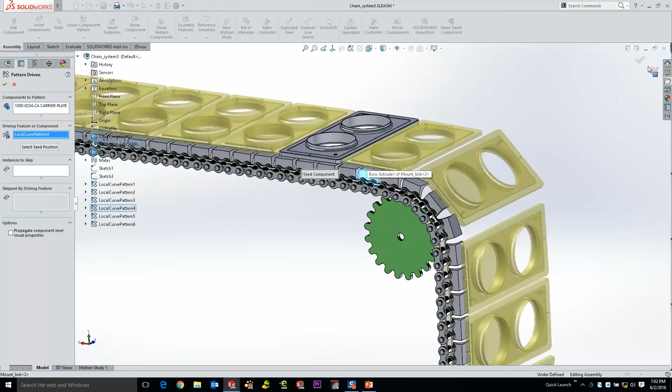This is a very large assembly, not the size you might have just seen from that zoom position. But with everything being associative, we start to change that sketch and make it bigger, change the positions of the sprockets, which would then change the sketch, the pattern, the number of links, number of carriers. It's all a very cascading element when you drive it at the lowest feature, the sketch driven by the positions of these sprockets. So very, very cool stuff there.

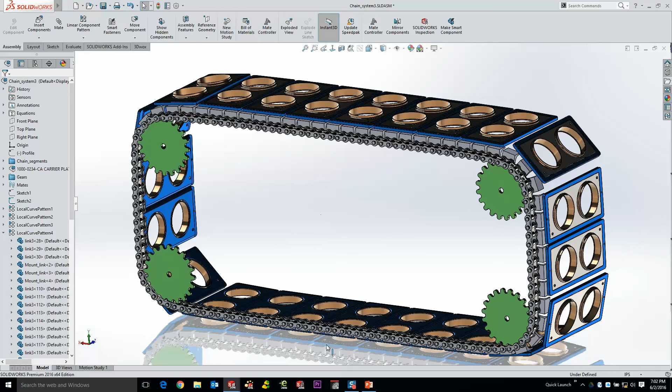With SOLIDWORKS, I'm starting to lose track of the versions we do these in, but this was around SOLIDWORKS 2014. We went to the ability to then do these kinds of patterns, not just in a visual representation, but also something that actually performed very well with basic drag and drop types of rebuilds. And that was something called the chain component pattern.

Now to show you what we're talking about, we're getting into a few different examples of things that look like what we see here, only this was done in a previous release using basic pattern features. What it didn't do was this kind of stuff. That is high performance drag and drop rebuild, which you really don't get by using a feature. Mates are what's going to make that type of thing happen in most cases.

By grabbing this link and dragging it around, you can see I can pull it around this very complex path and have very fluid motion driving this. Now what's driving the position is a gear mate. The 3 sprockets there have a gear mate. Their position or rotation ratio is going to be based on the edges you select. So essentially selecting the outside diameters of each is going to have them rotate at the proper ratios relative to each other.

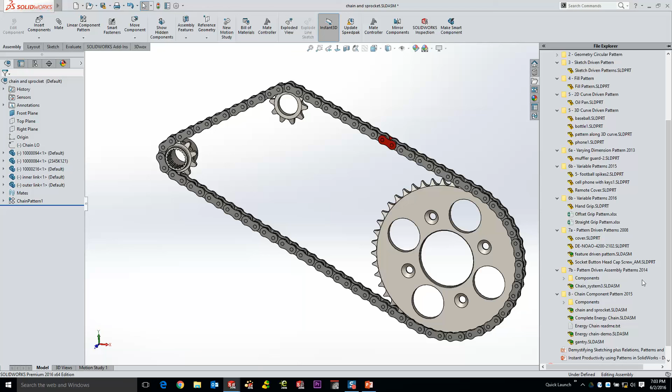But to create something like this, what we're really doing is taking a bunch of other things together and combining those. I've got this little one right here—that's my finished version. We'll get out of that one. This last gantry, though, is the piece that I want to show as an example.

And this is something a lot of customers use, these energy chains. You've got overhead gantries with racks that have a lot of cables in them, and as they slide back and forth, we want those pieces to physically move. Fanuc Robotics has been a customer of ours since 1997, and this is all over their stuff, so I know you've seen these in different places. One of the guys there wrote a program over the years to make that kind of thing happen, so it was really pleasant to see this within the software.

But let me show you exactly how this thing works and the steps it takes to make it tick. The 4 parts I'm dealing with here are all sort of unique. This part down here is fixed. We got to quickly do this one. This one's got all of its degrees of freedom. And then this one up here can rotate left and right, but it's basically planar or parallel to the top plane.

So this tool here is its own tool, it's at the bottom here and it's called a chain component pattern. The way you deal with this is very simple: the path is what you follow, like a curve-driven pattern. When you see the selection manager, take note of that, because if I selected something on screen right now, I'm only getting that top edge, not the entire curve.

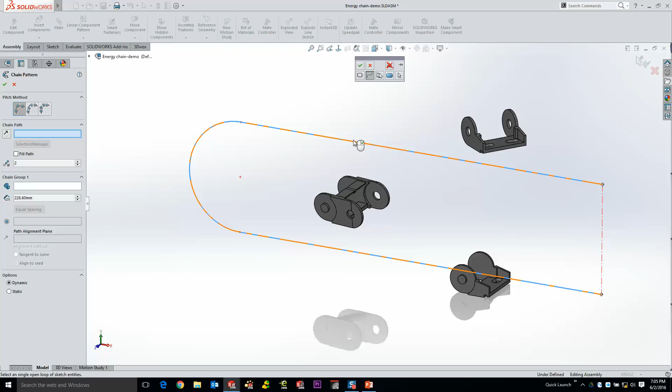But the selection manager allows me to, on the fly, select open loops, closed loops, or random selections that group together. When you select an open loop and grab that edge, it grabs all connected entities as one single entity. So that's an important thing.

Now I pick the thing that I want to pattern, which is going to be this piece of the sprocket—now its position, this piece of the chain. The position is relative to what we select next, and that's this pivot hole. We'll just grab the inside pivot. And then one other piece of alignment has to do with a plane in the center of this part. When you select the plane alignment, it'll take this part and preview it right down there on that chain path.

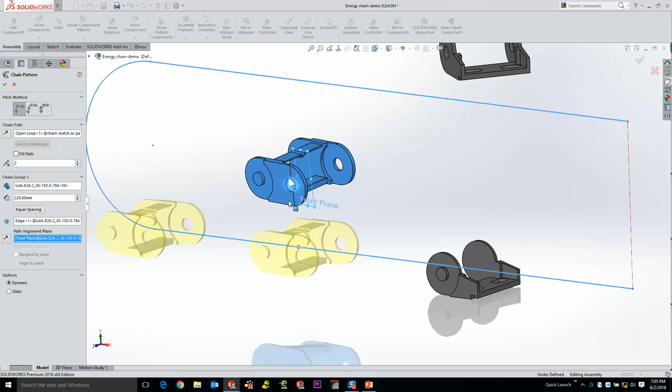Now what I can do here is fill this in with a bunch of instances. We can change the spacing on this one, which is pretty ridiculous right now. Let's make that like 20. Actually, 20 is even ridiculous, let's make it 50. So we get this spacing in here, but as you start to fill these things in, you're getting some behavior much like what we've shown in previous instances. As the seed feature changes, everything else relative to that actually changes.

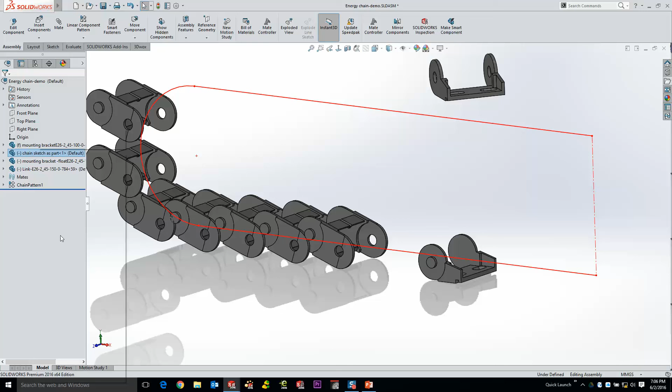Now this sketch here is part of a part that's actually moving right now, so I'm going to fix that so it doesn't move. But you see how these things follow. Now by editing that pattern, there's a couple of different ways to deal with this.

We can do this thing called a distance linkage, which then requires us to pick an additional pivot point here, so the front and the back of this piece of chain. By putting that in place, we now get a little bit more like what we're looking for, where these things follow the path, but they're still not connected to each other.

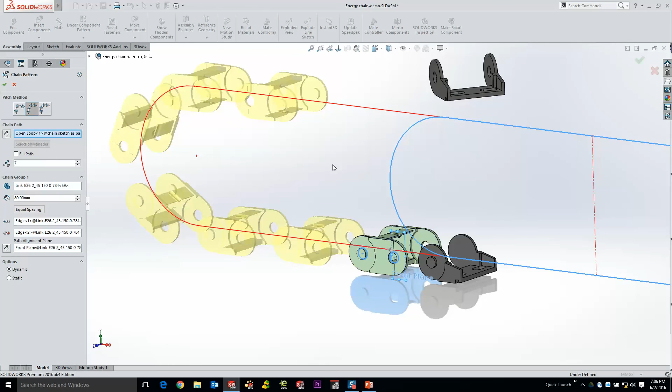Now in situations that we deal with here, where we're dealing with the way an energy chain is designed, it's designed so that it fits into itself. So the back half of this one fits into the front half of the next one. When you're dealing with either this situation or a bike chain where it has big link, small link, and they alternate, that's where you use this last option here called connected linkage.

Now what that automatically does is, because it knows the first and second pivot points, it will update that pattern relative, and then additional instances will simply get added. Now if you have that small chain piece, you just simply turn on chain group 2, pick that second part, first hole, second hole, and then it will know how to add and alternate those properly.

So in this case here, we're just going to add additional instances to the path. They know where the beginning and the end of each of them are, so they all fit together properly, and then that's going to give us a little bit more like what we're looking for.

So a little smart mate to finish this up. We're just going to drag these pieces together to add that concentric and coincident mate, and then same thing over here. Let's just go ahead and alt, pick and drag, and there is our concentric.

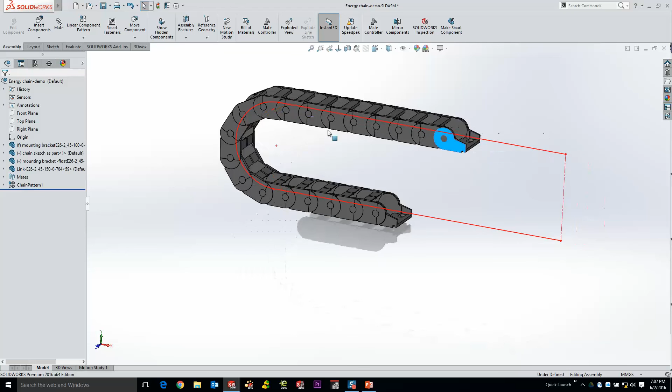Now by taking this part and floating it again, what we now have is this sketch can move back and forth. So even though you don't typically see it, it's following this part because the sketch allows the part to slide left and right. But typically in an assembly, you take that sketch and hide it, and the effect would still be the same. You just wouldn't visually see that piece.

The rub to this is that if the sketch has to rebuild, it doesn't work. When you move it and hit rebuild, it will update. So that's cool, but it doesn't work through drag and drop.

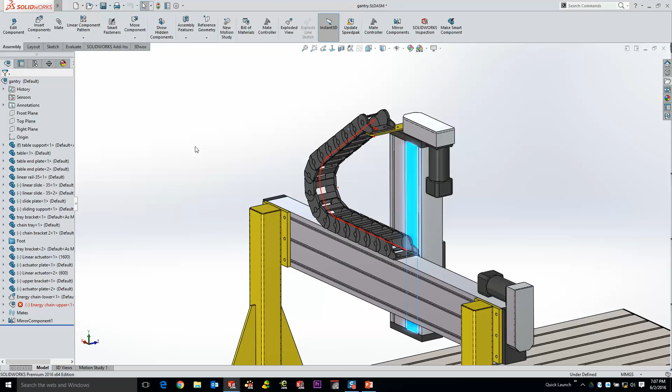Now, if you're ingenious to this part of it, you might know that SOLIDWORKS animation rebuilds every single frame that you make. So if I really want this effect to work, we can do a motion study, kick on SOLIDWORKS animation, which I'm going to move up here for 1 second.

And if I simply start an animation where I have a part, for example, like this part right here, maybe I want to go ahead and take that part and put a little key point right here. So I'll place a key. Then we'll move over 4 seconds, move that part to a different position, and then auto keys will give me a new key.

Now when we actually calculate this one, watch what happens in our path here. It starts to move. Now we got this red area. See, it lets go. However, the second time through, it calculates, and the animation will have the fluid movement that you're looking for. So that's a pretty cool little add-on to those kinds of things.

But any animation we do in SOLIDWORKS rebuilds every single frame. So the spring examples that you see where parts are moving and the length of the spring is relative to that movement, whenever you're animating, those rebuilds will pick up that type of a situation.